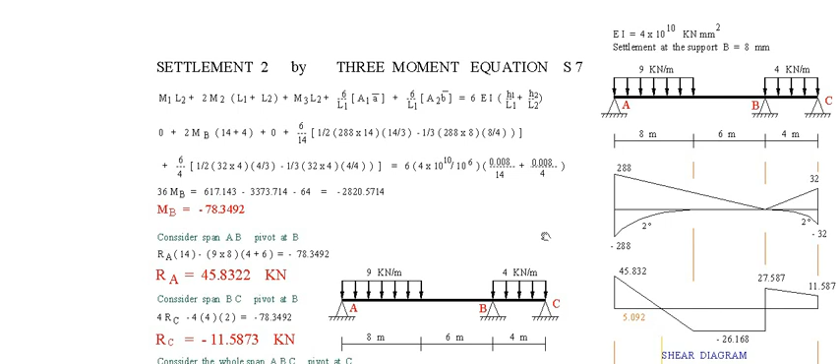We have only one unknown in this equation, with two spans. In order to solve for the reaction, we consider a cut section on the left of B. When we cut the section, there appears the clockwise moment at B. When you place the arrow here, place the arrowhead and this number, but do not write the negative sign, because this direction is understood to be negative. If you place the value here as negative, it means you reverse the arrowhead. So place the arrowhead here, do not place the negative.

It is understood to be the negative moment at B. So solving for RA, the moment at B is equal to minus 78.34. The moment at B is really minus 78.3492. So RA times 14 minus 9 times 8 times the distance of 10 and 4.

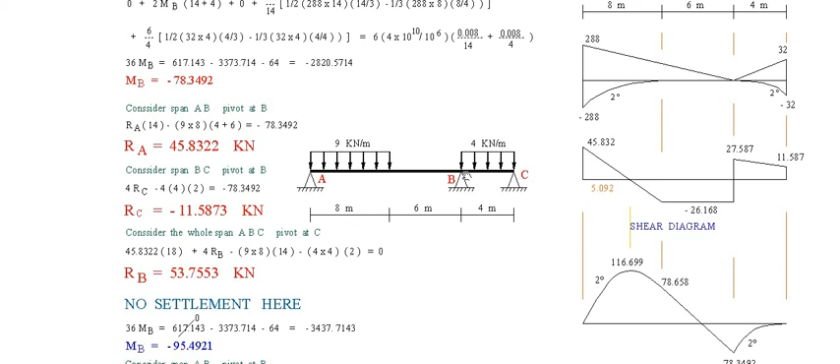Now, in order to solve for RC, we consider the right cut section of the beam. Cut section is BC. Then the moment at B is equal to the same, minus 78.34. So the sum of moment on the right is equal to the sum of moment on the left. The moment at B, if we consider the BC, is counterclockwise, this direction. Then the moment at B on the left is minus 78.3492.

So 4RC minus 4 times 4 times 2 is equal to negative 78.3492. Okay, that is the moment at B on the left. So solving for RC, it is minus 11.5873 kilonewton.

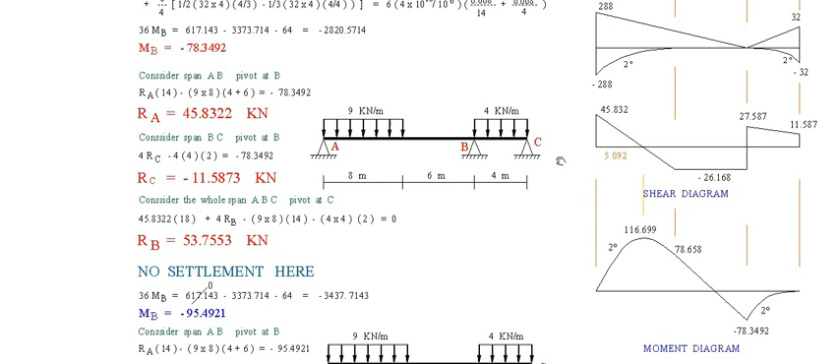Now we have only one unknown, RB. RA given, RC given, RB is unknown. You consider the whole beam ABC. Then take moment at C. Moment at C is really 0. So the moment on the left, RA, is 45.8322 times 18. This is 10 plus 8, 18.

RB, unknown, times 4, minus this uniform load, 9 times 8 times, this is 10 plus midway 4 or 14. Then minus 4 times 4 times 2, midway, and equate that to 0. The moment at C is 0. We have only one unknown, RB, and it is equal to 53.7553.

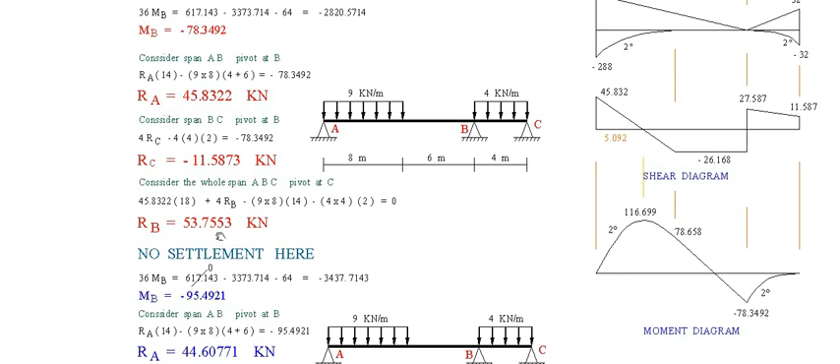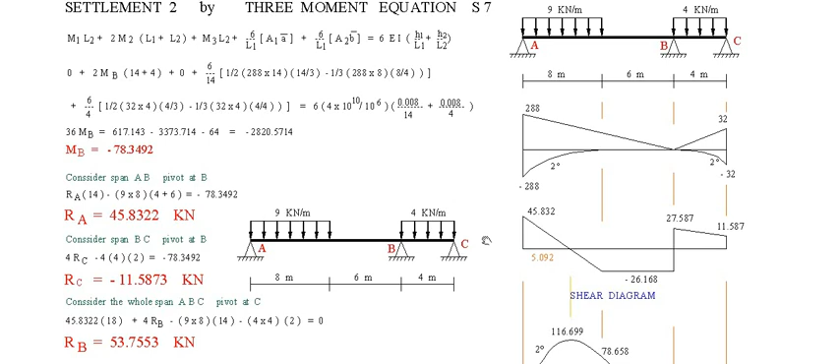Now we have already solved the moment at B, then the three reactions RA, RB, RC. All the unknowns are now solved, then we can draw the shear and moment diagram as this. Moment diagram. The values of this are from the topics of strength of materials, and I will not discuss this anymore. Okay, all of the forces must close, the moment must close.

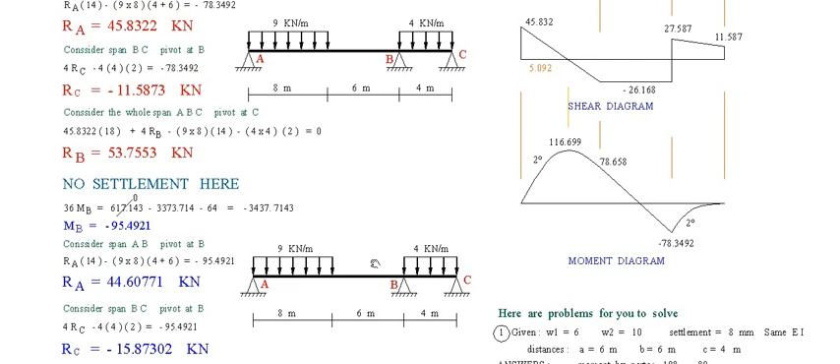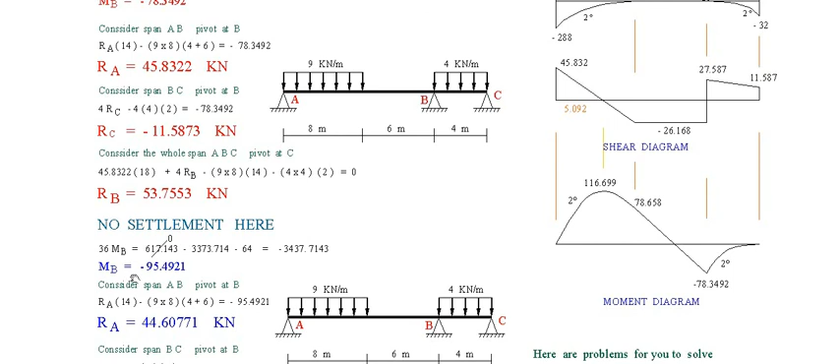Then solving if no settlement, if we consider that there is no settlement at B, it is just a simple three-moment equation. If there is no settlement, the solution is similar to the topics discussed above, only that you remove the settlement constant, this one. This is the same as here, 617.143, 3373.714. Remove these two constants on the right of the equality, it is minus 34, just add 64 here. It is minus 3437.7143. Then solving for the moment, this is minus 95.4921.

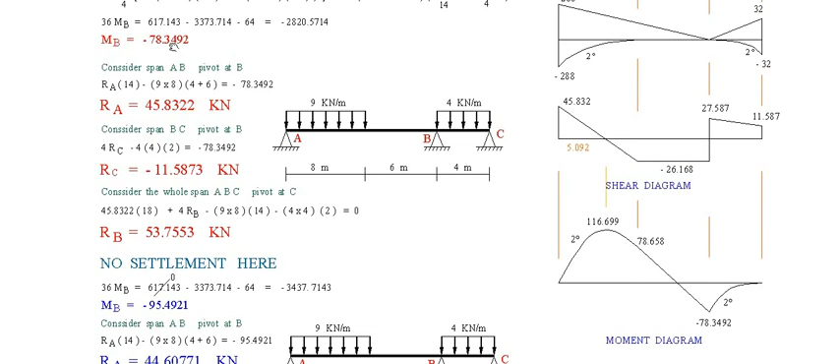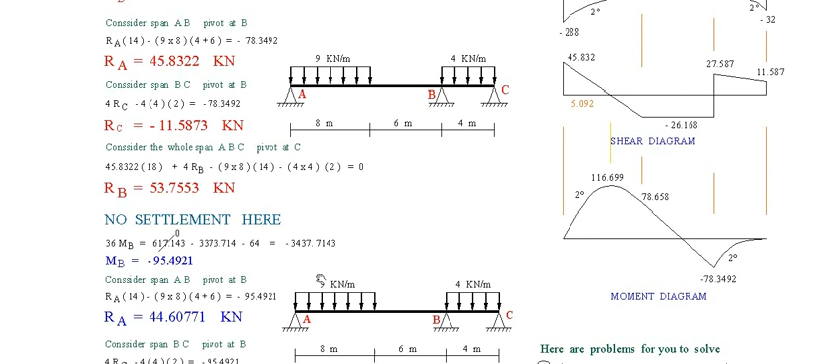It is different from this. Why does it become higher than this one? B is going higher, so the deflected beam, instead of bending so much, when there is no deflection at B, it goes higher. The bending is higher than that of the previous. Okay, the moment is higher.

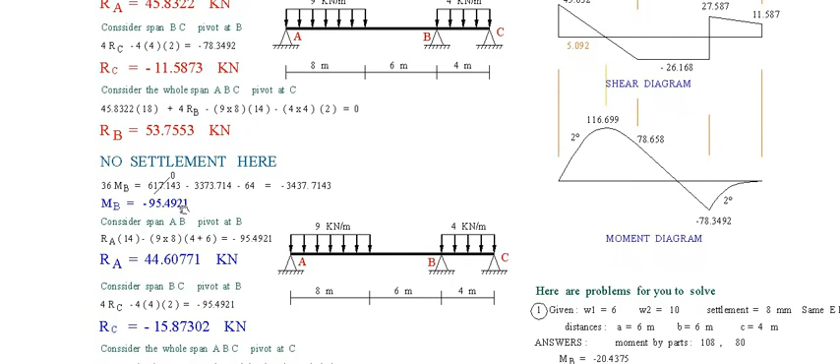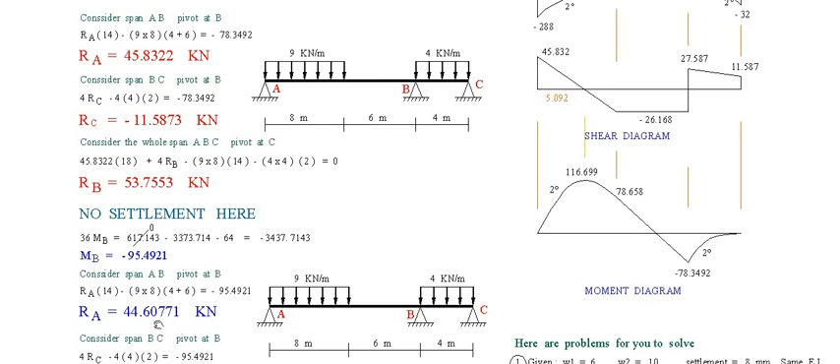Then solving for the moment, the solution for RA is similar to solving for this, only that you change the moment here, change the moment of 95 instead of 78, use the 95. Okay, the rest the same. So RA becomes 44.60771. Then consider span BC, solving for RC, same as this one, only change the moment, instead of 78 change that to 95. Then RC is minus 15.87302.

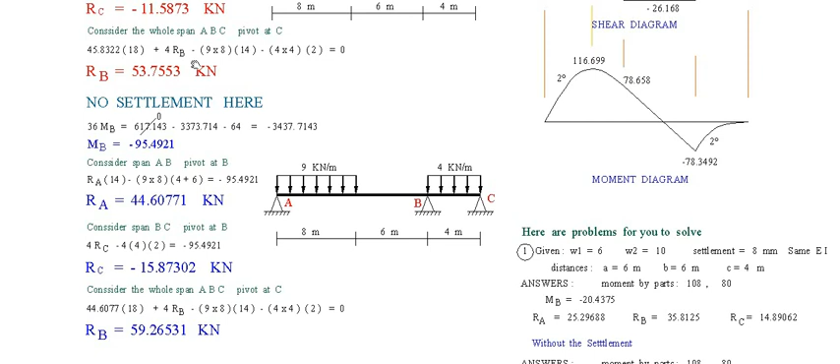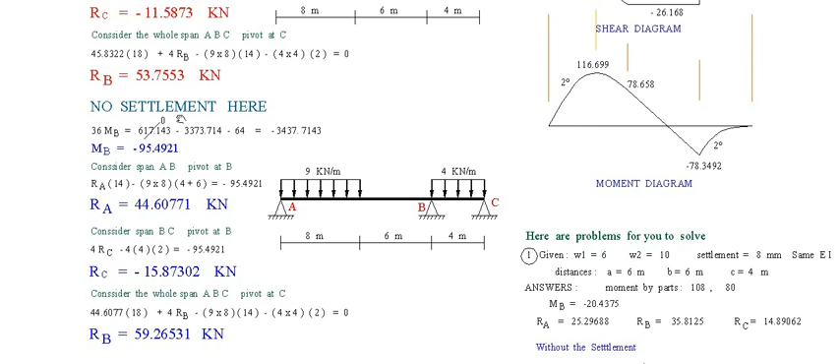Then solving for RB for the whole span, the same as the RB solution, only that you change the moment. There is no moment involved. RA is different from the above. So instead of RA as 45, the value here is 44. Okay, then we have only one unknown here. RB is 59.26531.

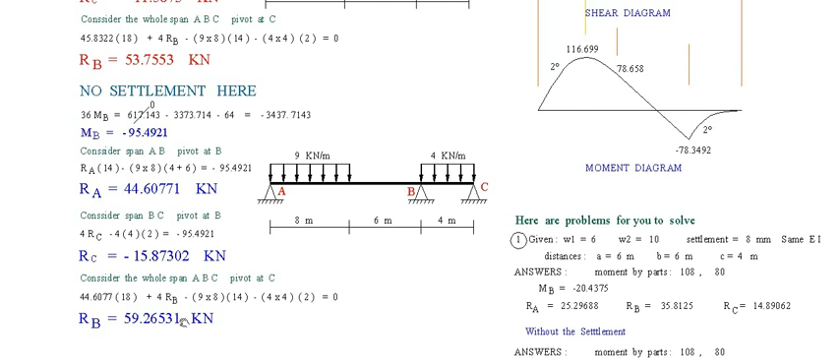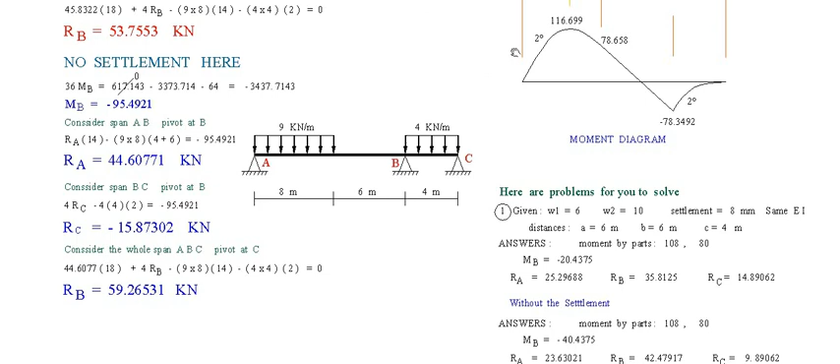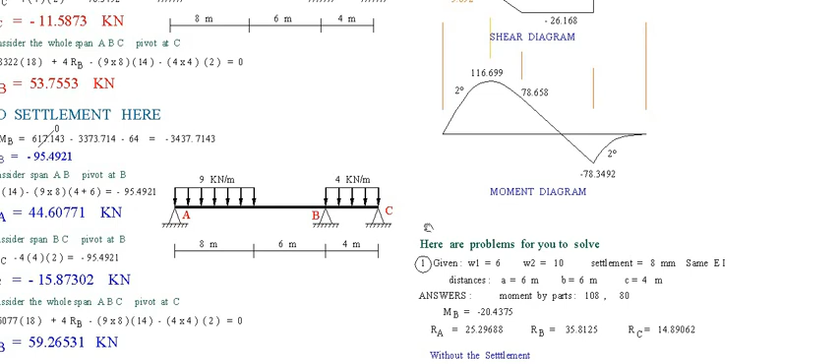Then to check whether your answer is correct, add RA, RB, RC. It must be equal to the external load of these two uniform loads. Okay. Then the plotting of the shear and moment diagram is almost the same as this. Only the values of the reactions are different and the moment different. Maximum moment different. Okay. The problem here is now solved.

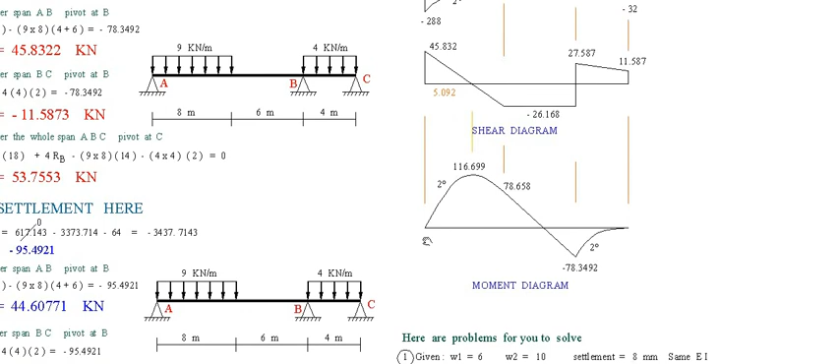So I will challenge you to solve this problem, to check whether you learned or not. So change the W, instead of 9 use 6, W1 as 6. Instead of 4 use 10. I use 10 to be higher than the left uniform load, so that it may make the reaction at C positive. Then distances, instead of 8 here, 6 at A, B as 6, and 4 at C.

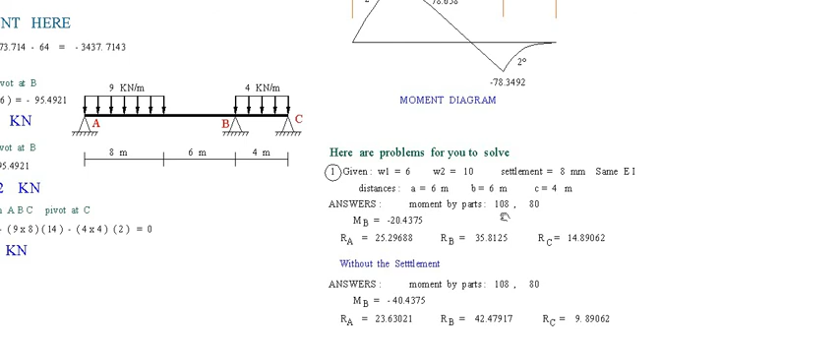Then the answers are moment by parts. The values are 108 and 80. Then the moments are this, RA, RB, RC are this. Okay, that is for with settlement of 8. Now without settlement, we have these answers, RA, RB, RC, without settlement.

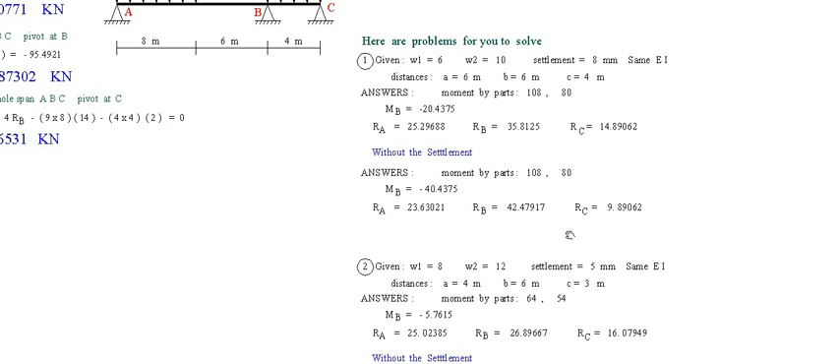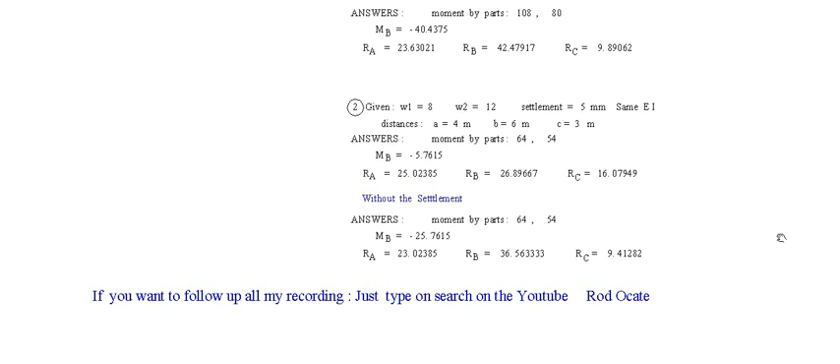Then there is also a second problem. We have this all the given. Just pause it on YouTube. Then copy this given and the answer.